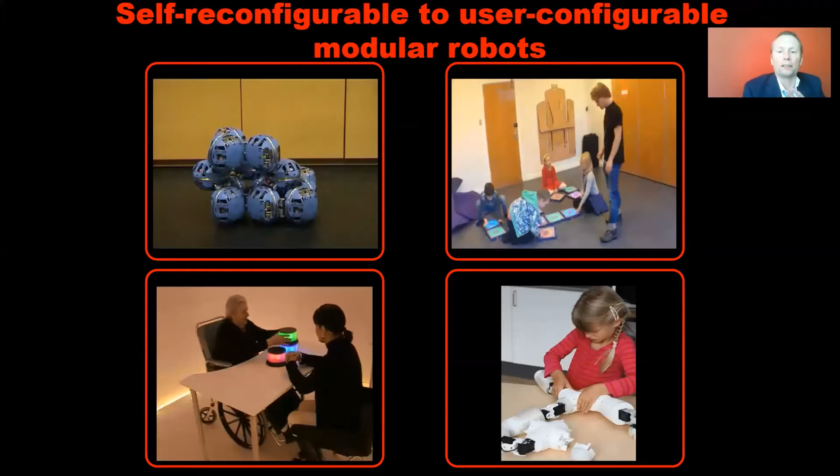This can, for instance, result in things like self-reconfigurable robots, user-configurable robots systems, as we have here on the upper left side. We created self-reconfigurable robots like the ATRON robots here that can move around on themselves to change the shape from a snake to a car to a table, whatever it may be.

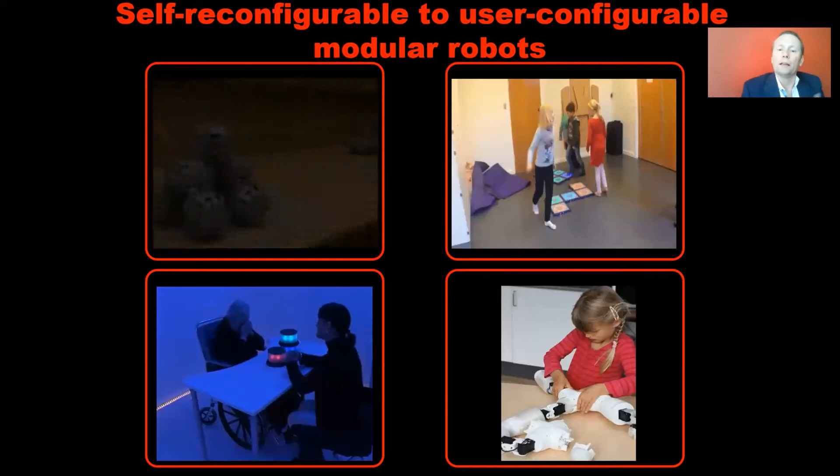But that's self-reconfiguration, and that's nice in terms of autonomous robotics. But if we're talking about physical interaction and learning by us human beings, then maybe the other examples are better, where we're moving towards user-configurable modular robotic systems.

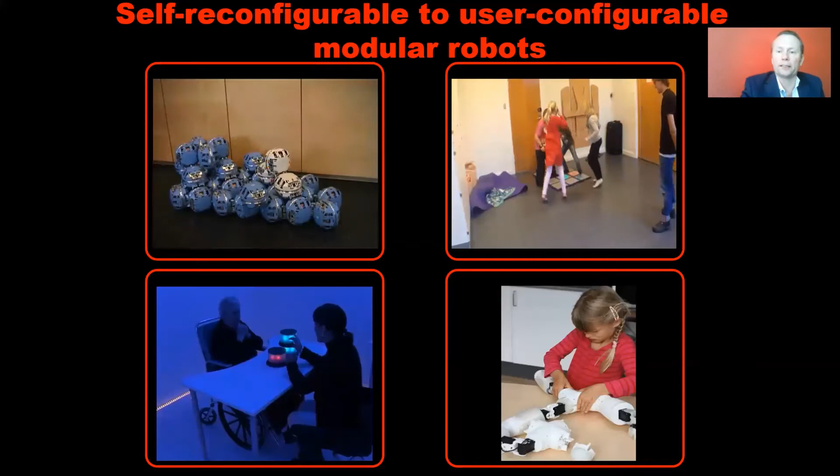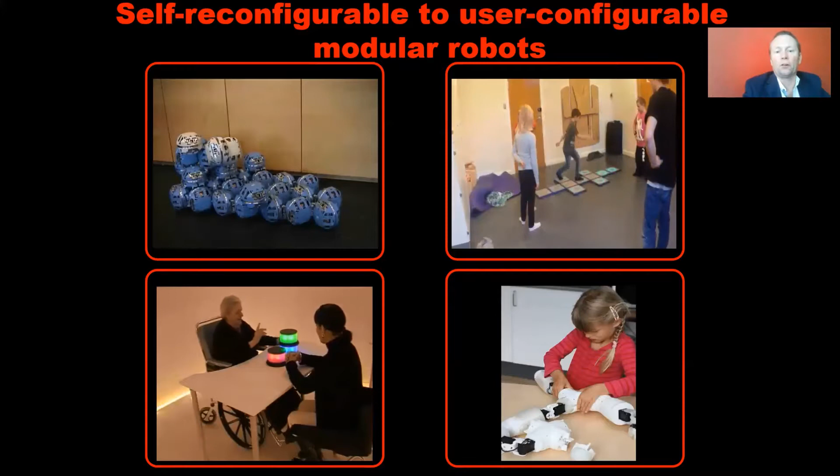Like you can see the kids interacting with these tiles. We had the example of the older lady on the lower left side when she's interacting with these light cylinders. When she puts them together, she's controlling the light in the cylinders and in the environment. You can see how she gets interested, because there's an immediate physical interaction and feedback to her.

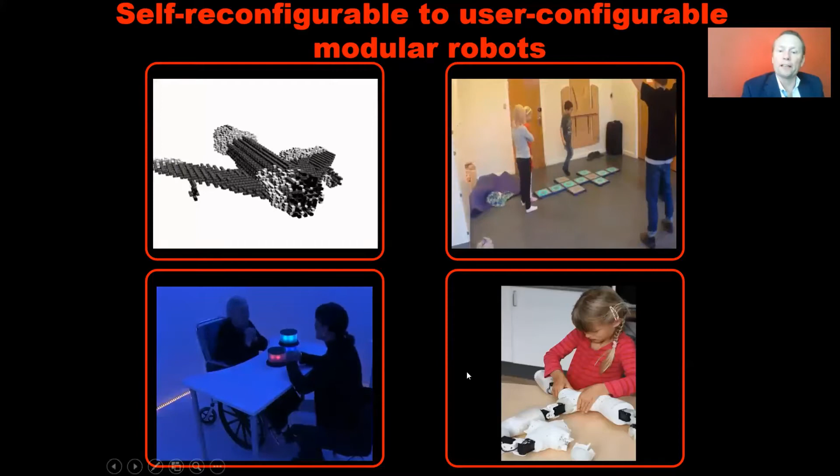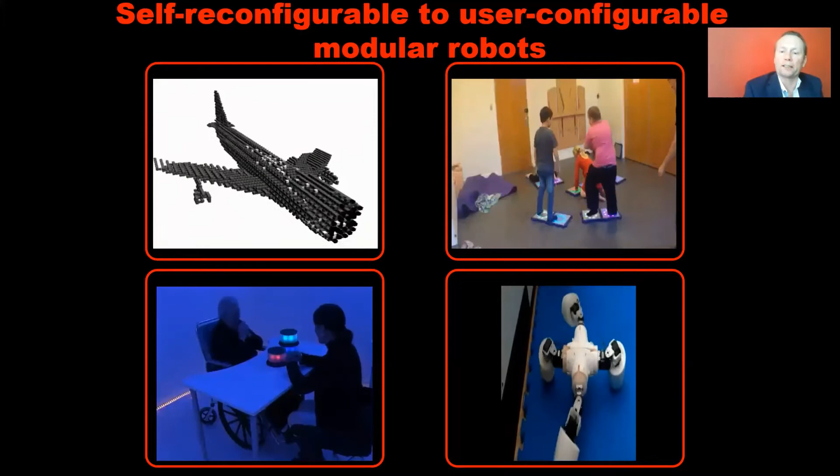Or, as you can see on the lower right, where people can immediately put the Fable robots together to create their own system with their own modular robotic system by click, click, click. They put them together and they have a robotic system.

So these were just some examples of where we're going from robotics and exploiting that to create user-configurable robots. But we can also see how we can use this knowledge from play to create user-friendly robots for other things.

I'll give you one example here. This is a good example that may inspire you where you can go in future by learning about how to create play and playware, and user-friendly, minimal robotic systems, and exploit that further.

The example I will take is the exploitation in industrial robotics. Now, I told you that since the 90s, we've been working together with Lego on creating this kind of Lego robots. In that work, we exploited and explored how to create playful robotic systems for children, minimal robotic systems, user-friendly systems, how to create behavior-based control systems, biomimetic control systems, and so forth, exploiting the modularity.

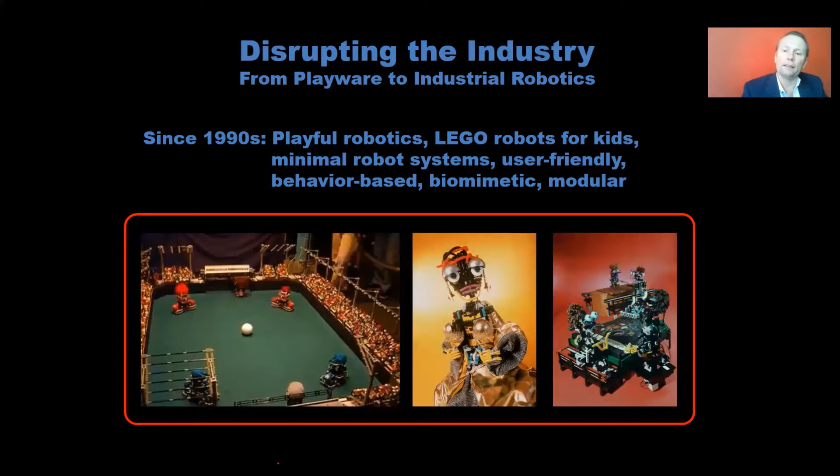They went through a process like this over about a decade. When we started out in the Lego lab, they were doing their bachelor's on these things with the Lego robots. They did their master's thesis on this, then went a year to the United States as research assistants. Esben came back to do his PhD study on the Hydra project with the reconfigurable robots.

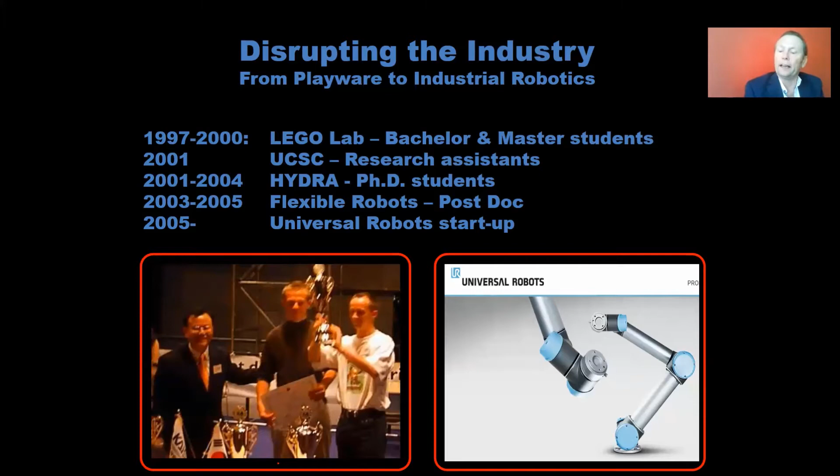And then he did his postdoc with the flexible robots we were creating in the project, and then later started a new company called Universal Robots.

Now, the first thing, some of the things we did in that process was, for instance, as you can see on the video, this is small Khepera robots playing a football game, where one of them, the one scoring the goal now, is developed as an evolutionary robot that develops by an evolutionary process by itself the neural network controller of that.

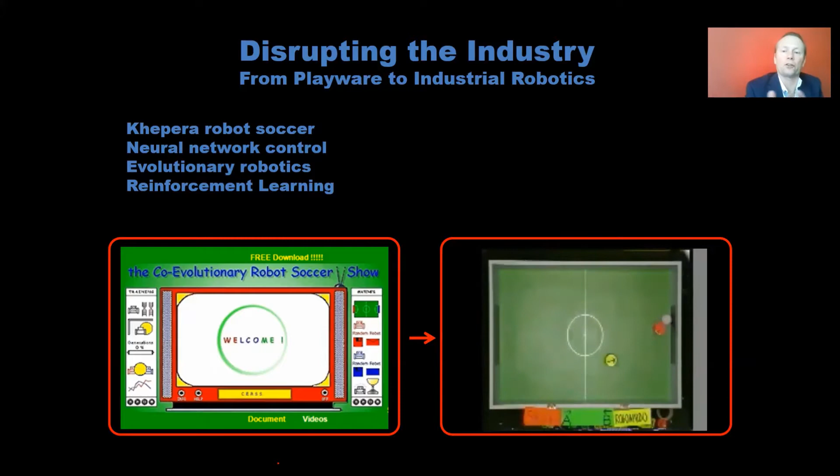And it plays in the video that we see here against a hand-programmed robot. We could see that these systems could evolve their neural controllers in a simple way, where on the left a co-evolutionary robot soccer team actually wins against the hand-programmed robots.

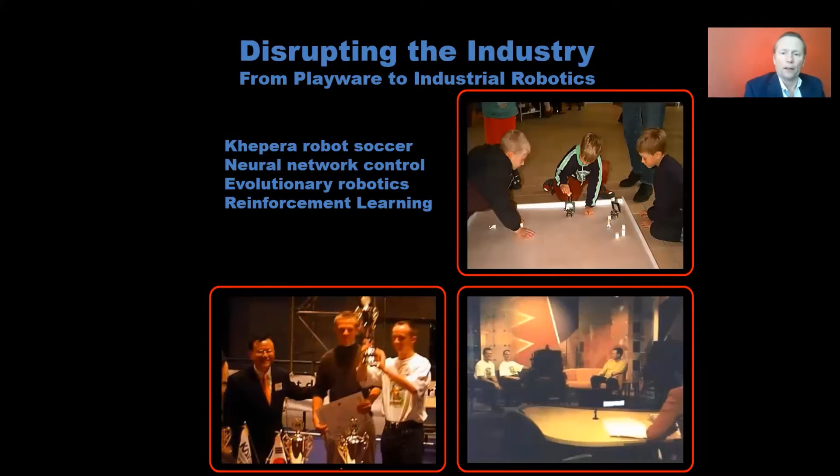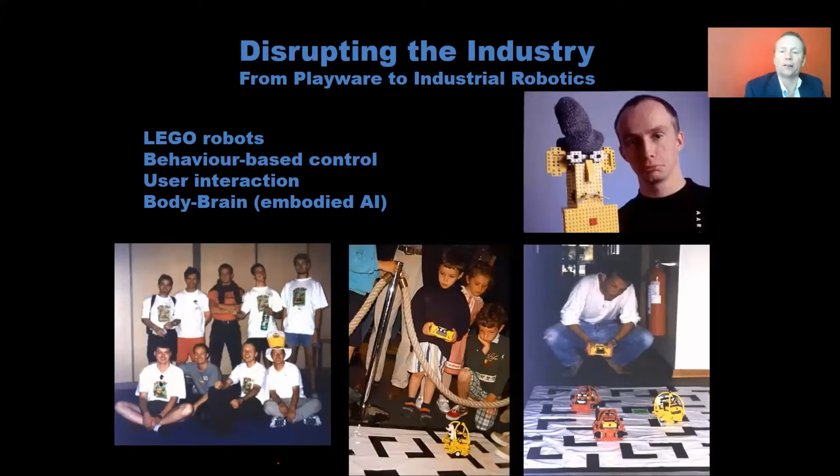We explored these things also in children's interaction. You can see in the image where Esben and Kasper won the championship with the Khepera robots that were developed. We also went to create these things with behavior-based control on the Lego robots. You can see Kasper on the top image and Esben below him controlling this Pac-Man game that we created with the Lego robots, allowing the kids to interact with it. So they went through a long process of this.

We went on to modular robotics, understanding how to use what we had learned from the Lego robots to create these modular systems, also together with Lego in a European Union project on this.

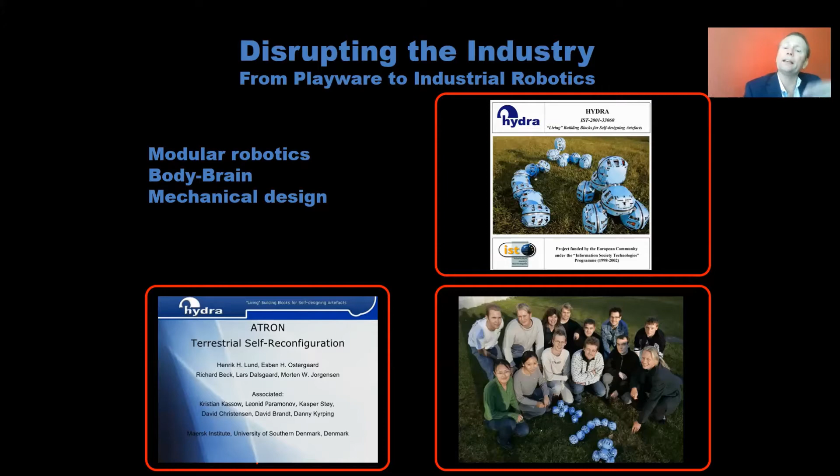And then later on we started. I was so lucky to be able to go together with companies like Easy Food and Dancake to try, in a project, to create flexible robots for small and medium-sized enterprises, where we would look at how can we create adaptive systems, user interaction in a simple way, much taking inspiration from what we had learned over a long time from creating playful robots, user-friendly robots, minimal robots for Lego. We said, could we apply that also to this sector of flexible robots for the industry? And that was the idea.

Then, late after this project finished, Esben Østergaard, together with Kasper and Kristian Kassow, took this on and said maybe we can apply that on a larger scale to industrial robotics, taking this inspiration from play and Playware, playful robots, user-friendly robots, and applying that here.

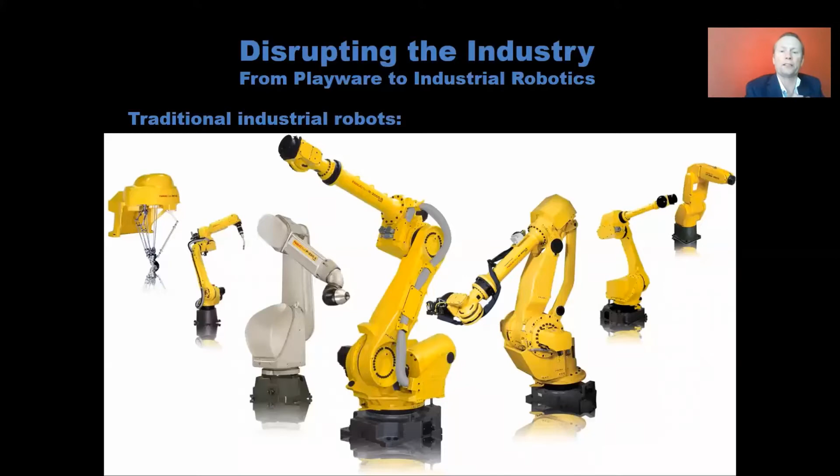Because the traditional image of industrial robots was, as we see here, big and bulky and hard robots that we could say are characterized by being large, heavy, dangerous. They have hard movements. You need a lot of control theory to understand how to control this, and thereby, if you want to reprogram, you also need a skilled engineer. And often you see that this kind of robot is in situations like this, inside a cage, because if you're not careful and not controlling this well, they will hit you and can literally kill you.

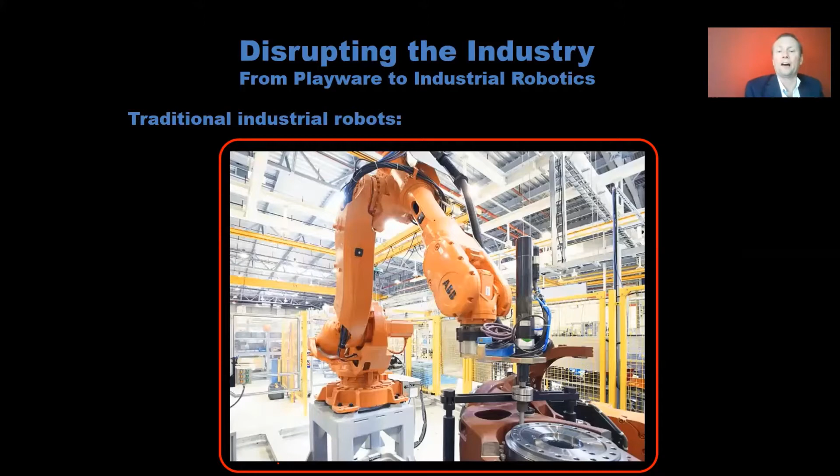So they are inside this cage, and of course that doesn't really allow this to be applied in many different situations. It allows this to be applied in heavy industry, you can say, but not so much for the small and medium-sized enterprises.

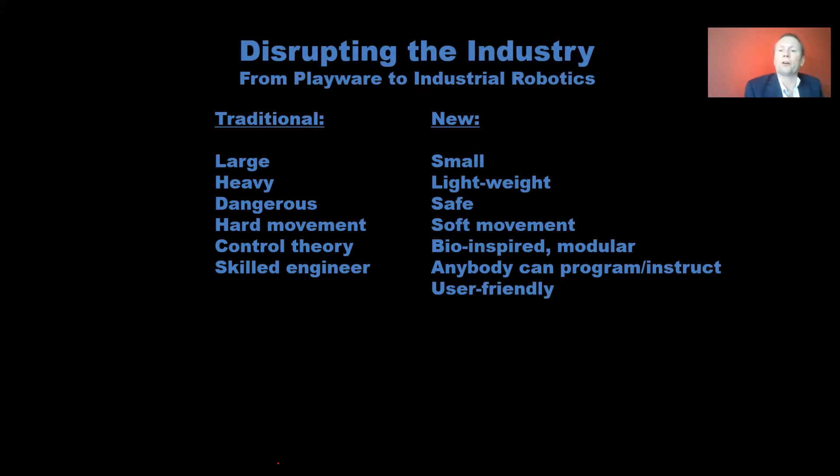So the new idea was: could you create robots that, instead of being large, were small; instead of being heavy, were lightweight; not dangerous, but safe? They would have a more soft movement, be more bio-inspired, allow anybody to program and instruct them. They would be user-friendly and not need a skilled engineer every time you need to reprogram the robot.

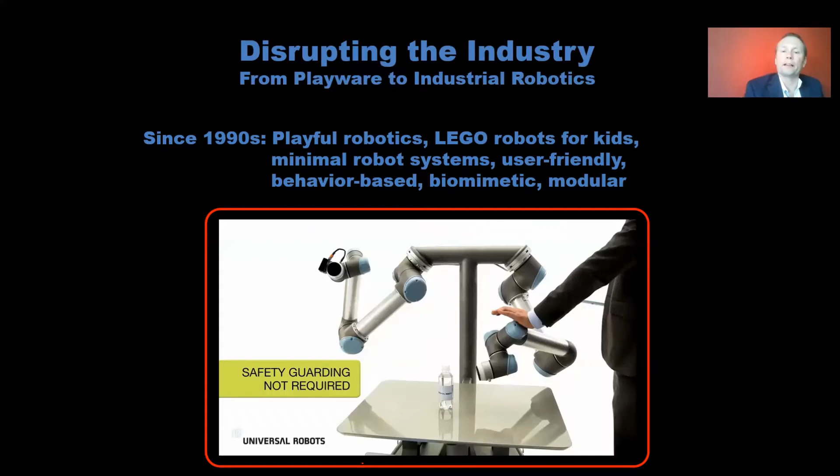So they took this idea on, and they created, in the Universal Robots company, robots that are so easy to program, so small in comparison with industrial robots, and so safe that there's no safeguarding needed. You can just interact with them, program them with a simple interface - no programming experience needed.

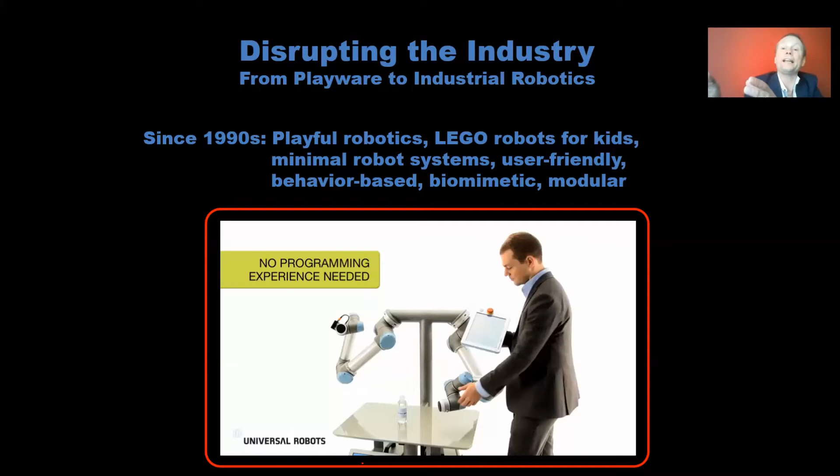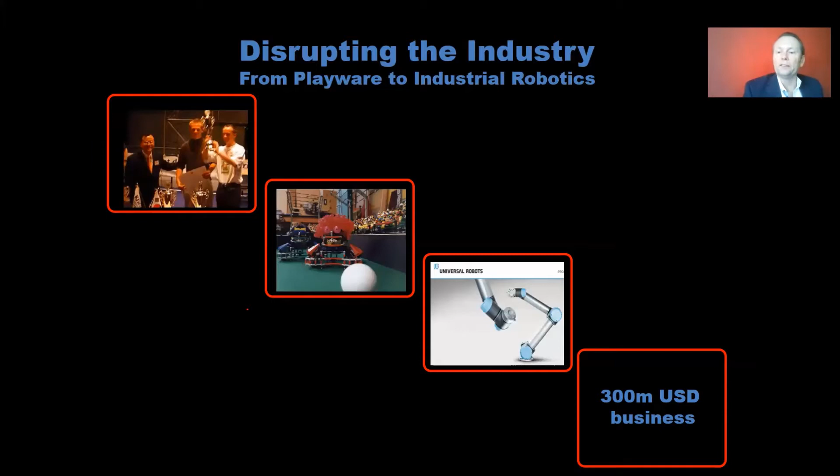And of course that ended up being a huge success, taking this inspiration from creating user-friendly minimal robotic systems and applying that to a new sector like the industrial robotics sector, so that they were actually able to create a $300 million US dollar business, sold for that amount to Teradyne about 5 years ago, and nowadays is a huge success as one of the biggest robotic companies in the world, selling all over the world in large volumes.

And this is really part of what we can call the fourth industrial revolution, that facilitates that you can use robotics anywhere, that anybody can have their own essentially tabletop production in the end. And remember, this comes out of this long tradition of trying to understand playful robotics, Playware, and then applying that to another sector.

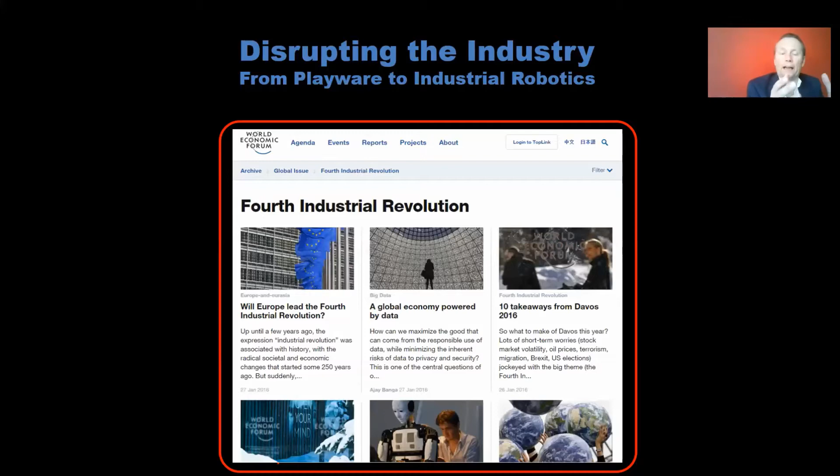So we can think, can we also apply that - or can you, hopefully, when you learn about these things and start doing this, be the next one who makes a $300 million business out of this? If you start to apply these things to other sectors, like the health sector, entertainment sector, educational sector, or whatever you may come up with - because we believe that you learn so much about these principles that they are easily applied to motivating people to interact with your devices, if you understand this well. So you can apply that in many different sectors in your future work life.

So just to give you some ideas about Playware, we can watch this small video seeing how we are creating Playware for different purposes.

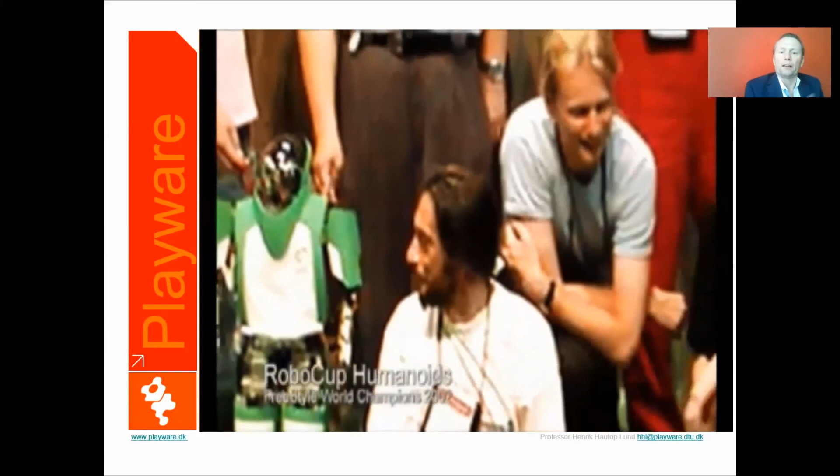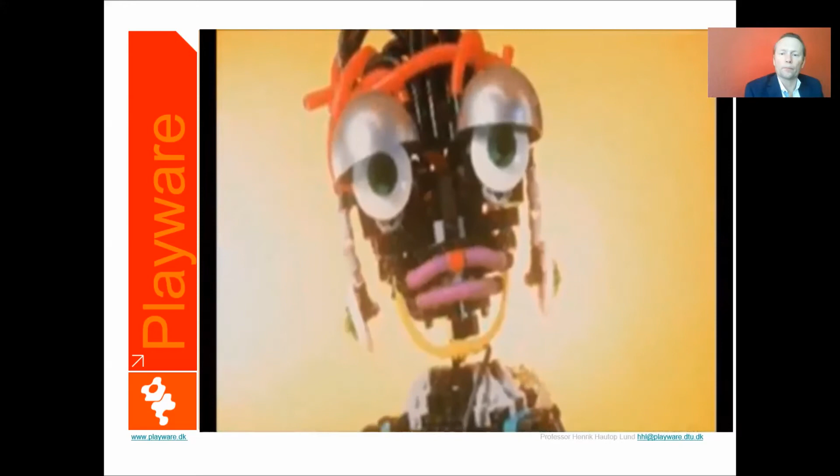In 2002, the entertainment robot called VIKI won the RoboCup Humanoids Freestyle World Championship. Since then, Lund and his collaborators have extended the Lego block with processing and communication power to become robotic building blocks known as the iBlocks. The iBlock allows you to program by placing them in a given combination. No need for a host computer, no need to learn syntax. A democratization of robots, you might say.

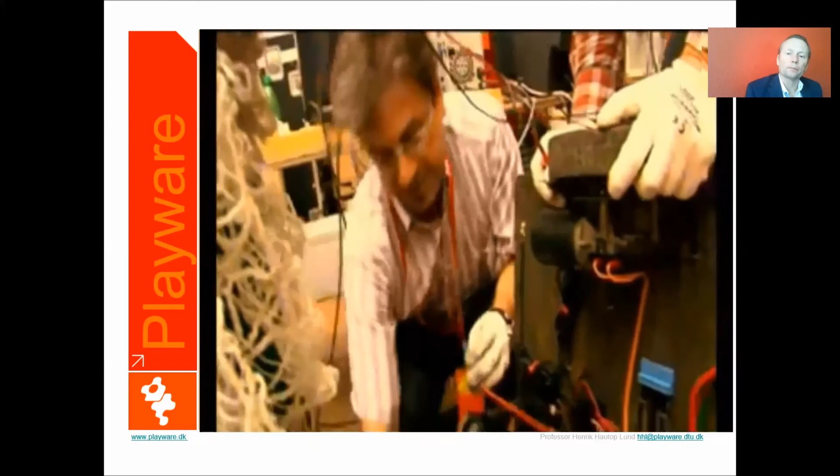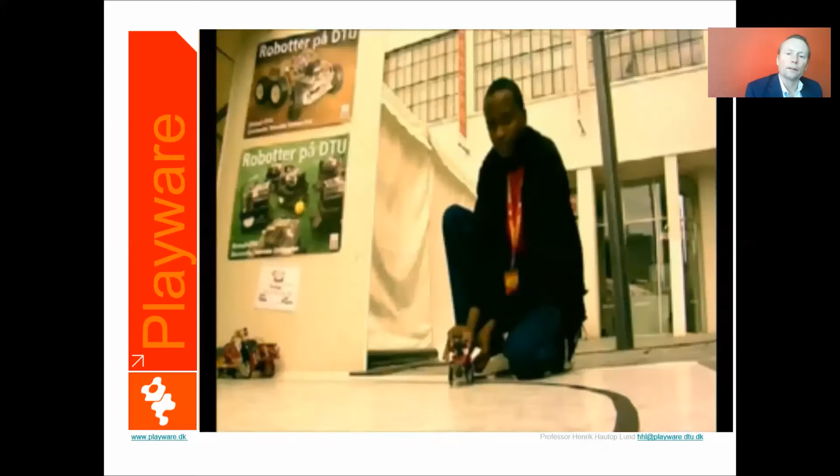The idea, developed partly with the University of Siena, is to make abstract concepts concrete. Today, the iBlock technology is used for teaching where cognitive abilities are too low or where cultural barriers are too high. For instance, Lund's team used the iBlocks for IT training in schools and universities in Africa. Now, African users can become developers rather than just users. To stimulate this development further, Lund and his colleagues have founded East Africa's first science and business park in Iringa, Tanzania.

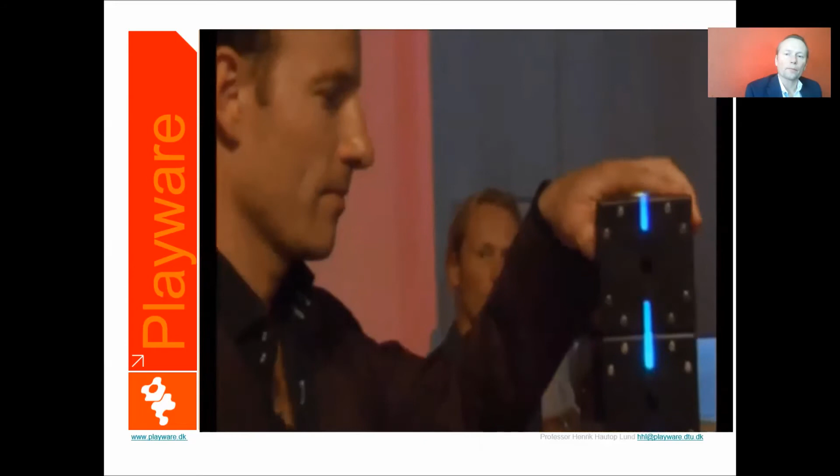The iBlock also makes it possible to interact with the creative musical process, even for people who don't know music well. Collaboration between Lund and World Music Award winner Funkstar Deluxe has led to Robo Music. When you combine the iBlocks, you change the music. You become an involved part. The experience of collaborating in the music during a concert expands the experience of the spectators many times. Take a look at the audience faces - they're involved.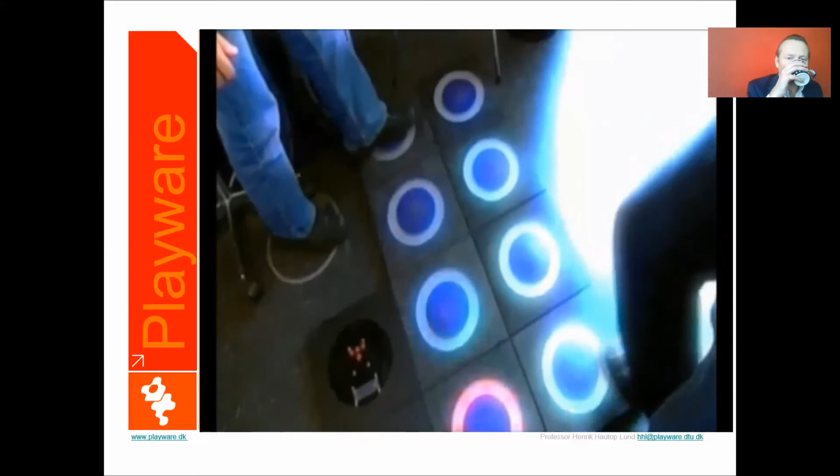Another modular robotic device are these robotic tiles. Each senses pressure when you touch them, and they communicate via infrared to each other. One use of the tiles is to play physical computer games. Installations in so-called Playware playgrounds, in schools, kindergartens and youth clubs, have given Lund's team a chance to study the user experience. No doubt, the children become motivated to become physically active in more ways than one.

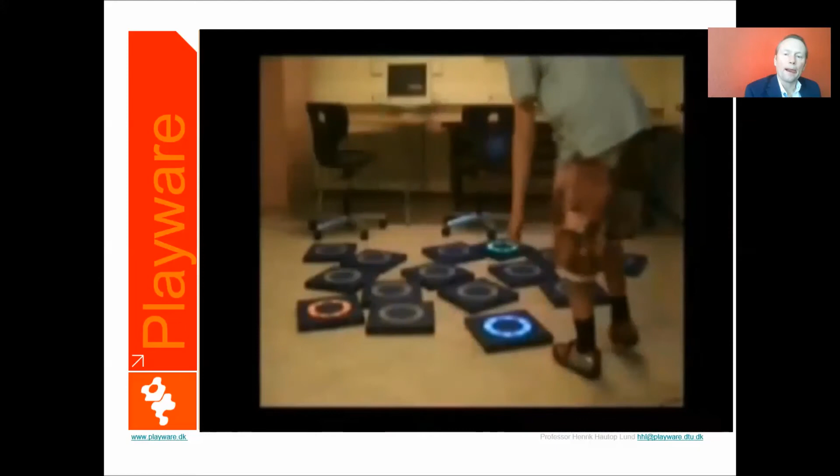Not only do the tiles function in playgrounds, they've also found their way into hospitals and among therapists. The modular robotics tiles are used, for example, with children with autism, or in hospitals, where the response of a sensory input provides healing for patients.

So when we're creating these different modular playware devices, we have a number of design principles. These are tools with a behavior - they're doing something, so we can program them to do something. That gives a motivation and engagement by an immediate feedback, what we would call an explicit immediate feedback. And we can create this to be adaptive. There will be a modularity and thereby a flexibility in this. And we create the robustness through a distribution amongst units.

We'll explore some of these themes in the course here, and also in the scientific articles. One of them, you'll see there's a reference to Lund, March 2009, where we go more into details on these different design principles, so that we understand how we can create this kind of devices, and what are the principles that you can use when you would like to create this in the best possible way.

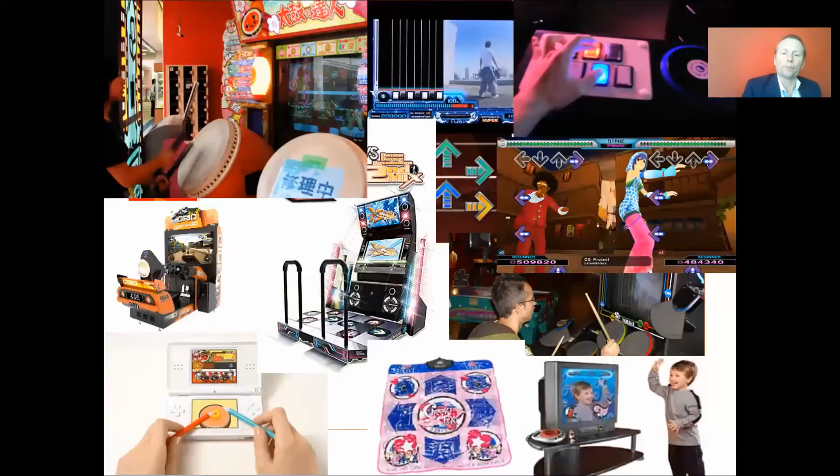And this kind of things, of course, have a long history. If we look at Playware, what are the examples that we know? Here I just put up a number of images that you can recognize - this kind of physical arcade game that you have tried, maybe a racing car, or a dancing game, or a music drum game, in the arcade hall, or in your private home, where you have probably tried things like the Wii or Kinect, that allows you to do this physical interaction, or outside in playgrounds. We see it in rehabilitation units, in art museums, where you're interacting with the technology, where you have a physical interaction with the playful system.

So if we go back in history, the first examples that we see of this kind of physical game interfaces are in the 1990s. Konami made what they call Bemani, the Beatmania series of music games, and Namco made the Taiko no Tatsujin drum games.